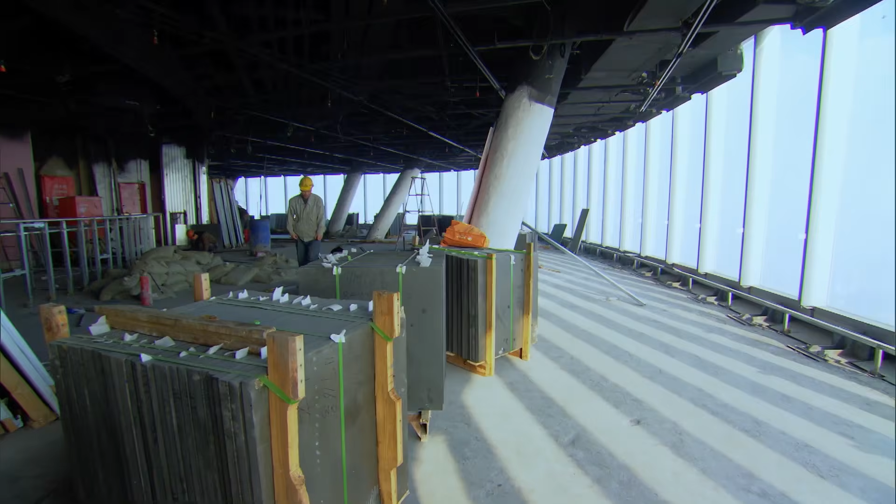At an astounding 632 meters, the Shanghai Tower will be the second tallest building on Earth, the tallest in China, and one of the tallest ever built in a seismic zone. It will be the most advanced building of its kind on the planet, with 128 floors and 9 indoor gardens, where 16,000 people will work, sleep, and shop, making it a true sky city.

And yet, this is one of the most difficult places on Earth to build a skyscraper. Building a super high-rise building in Shanghai is quite unique because you have to deal with the wind load and also the earthquake load. For Dennis Poon and his fellow engineers, it's a seemingly impossible challenge. I cannot believe that today we're designing the tallest building in China and also the second tallest building in the world.

The engineering complications begin at this mighty tower's roots. Because not only is Shanghai an active seismic and typhoon zone, but amazingly, this megacity is sinking into the soft soil below. The land under this massive metropolis is deflating like a giant air mattress, as its shallow water table collapses under the weight of its modern buildings.

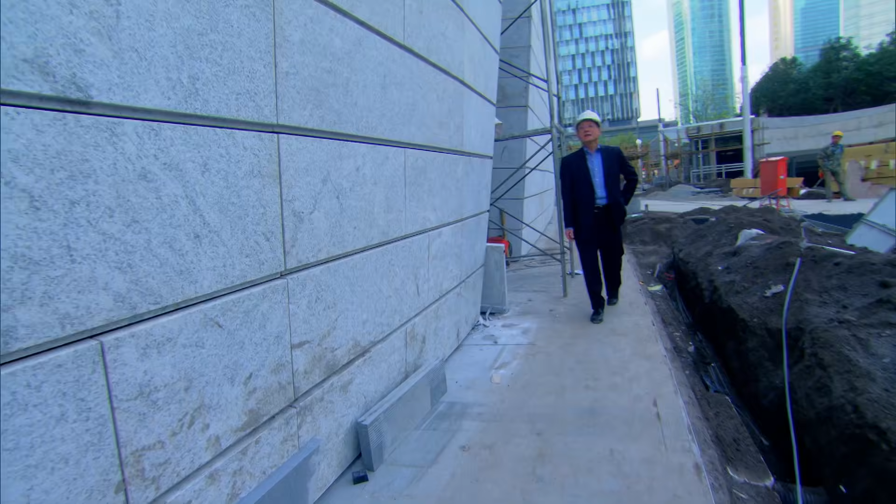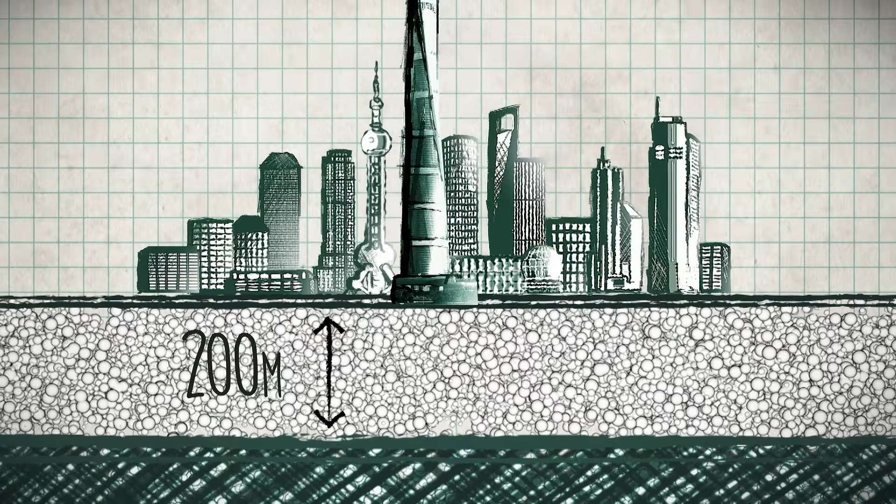For the Shanghai Tower, one of the biggest challenges is the foundation to support this super tall building. With its weight of 850,000 tons, how do you support it in the soft soil condition locally in Shanghai? The solid bedrock is 200 meters down, with Shanghai itself wallowing on a soft layer of sand, clay, and soil. A geotechnical nightmare ready to swallow an 850,000-ton building like the Shanghai Tower.

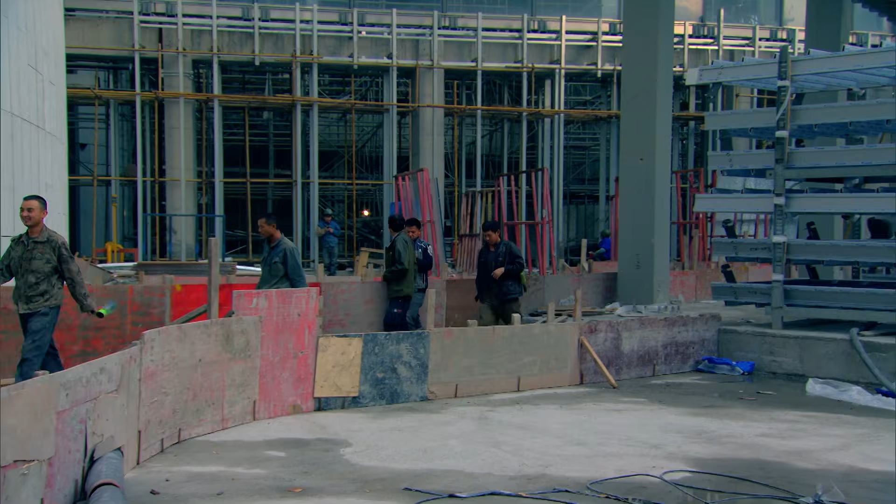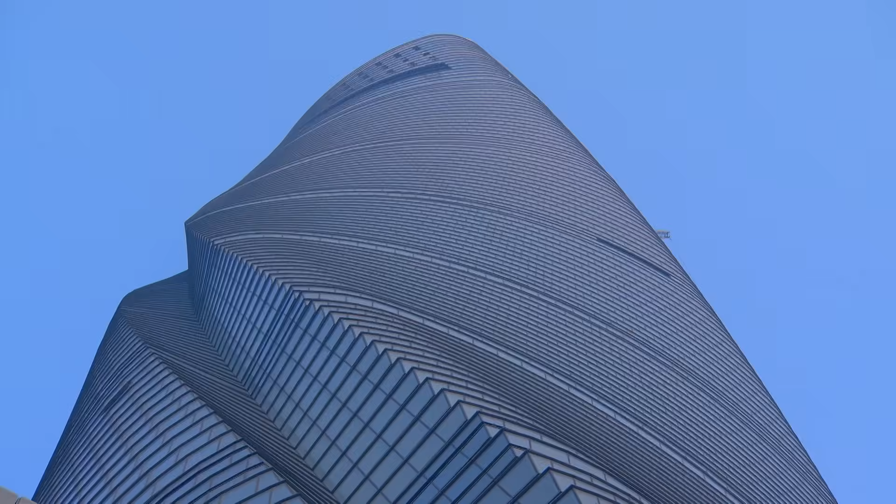So we have to design and build this foundation for the tower to deal with these challenges. And the engineers only have one shot, as constructing a tower this tall leaves no room for error. For a super tower, of course, the whole design challenge is to do the foundation right, so you don't have future problems, because you can't fix it later. The engineers will have to look to the great innovators of the past to defy this seemingly impossible challenge.

Once upon a time, the modern world of skyscrapers was inconceivable. Early man was limited by what nature would provide. And for the ancient Egyptians, taller had to mean wider, and an awful lot of manpower. Unless you believe in some of the more otherworldly theories. And when it's come to building towers, the ground below has frequently thrown a spanner in the works. Mamma mia! In order to create a skyscraper 11 times taller than Pisa's famous Leaning Tower, the designers of the Shanghai Tower will need to draw on the inspiration of 19th century engineering pioneers.

The US city of Chicago is home to one of the world's most iconic skylines. But just over a century ago, engineers were faced with a challenge that meant building any higher than just a few stories above street level was a near impossible dream. You wouldn't know to look at it, but Chicago is actually one of the least logical places that you could ever attempt to build a skyscraper.

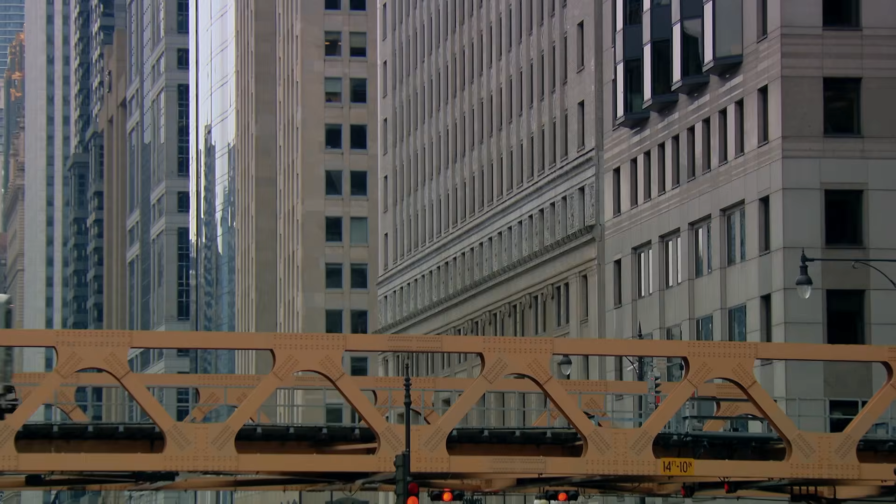We've got soil here that is incredibly squishy. Underneath this shorter, smaller layer of earth, we've got a very, very deep layer of soft, squishy clay. This is a really difficult thing to build a skyscraper on, of course, because when you load it, the building's going to sink. As property in downtown Chicago grew ever more valuable and the city began to boom, the need to grow higher and maximize space posed engineers a problem. Taller buildings would mean heavier buildings, and as they had discovered, there was a limit to the weight that the local soil could take.

This is the Auditorium Building of Roosevelt University, designed by Adler and Sullivan in 1889. It's a national landmark and so important to Chicago as well.

The building is 72 meters high. When it was completed in 1889, it was the tallest building in the city, one that would have been unthinkable just a few years earlier. And the radical innovation that made it possible came from engineer Dankmar Adler.

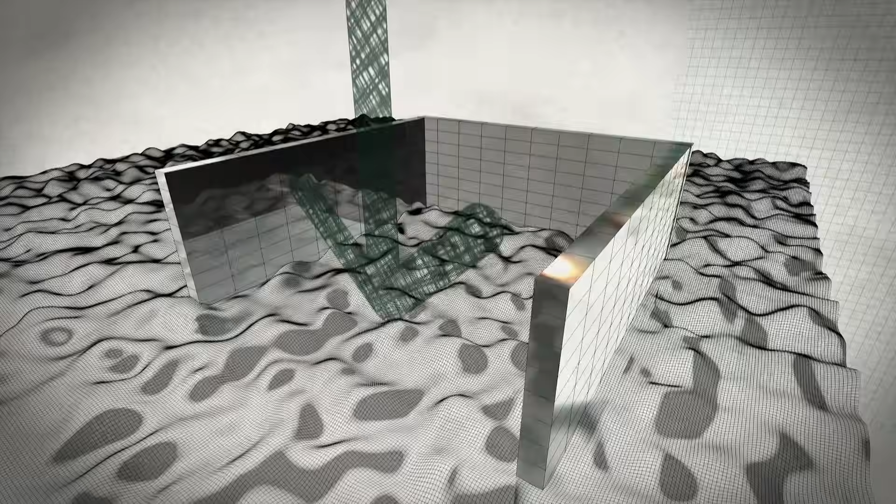We're headed down to see Adler's specially designed foundations to deal with the soil here in Chicago. Previously, the whole weight of a building would bear down on its walls, which would sink into the clay like a cookie cutter. Adler's innovation was to use wood and steel crossbeams encased in concrete to create a reinforced concrete raft that the 110,000-ton building sits on.

I'm going to illustrate what's happening here with this piece of modeling clay used to represent the clay that's under our feet here in Chicago, this sort of peanut butter jelly-like substance. The clay is really quite deep, and the bedrock doesn't start in Chicago until 75 to 100 feet below the surface. So I've got my chopstick here to sort of illustrate, and I take my structure and I go through the hard pan, and they just didn't have the technology in the 1880s and the 1890s to excavate that far down to bedrock. So instead, architects, engineers here in Chicago are coming up with new ways to solve this problem.

The method that we're standing on here is sort of the equivalent of this kind of penny that I'm going to illustrate. So this pad or this raft is put down, and then the building, the column on top of that is put on top of that. And you can see that I can push it down a little bit into the clay, but not really that far. This is distributing the load.

Adler's revolutionary engineering solution made building on substandard ground possible. And today, the city's tallest building, the Willis Tower, rises 442 meters, more than 6 times the height of Adler's auditorium. But despite its influence, the auditorium's design wasn't 100% perfect.

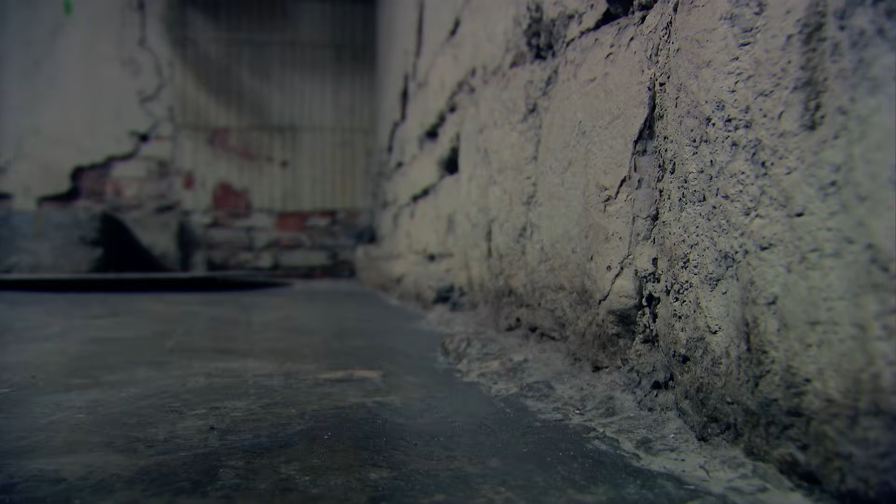So on the north edge of the building, we've got these large, heavy exterior walls that are much heavier than what's happening on the interior of the building. And we can see the challenge with that, the fact that this is much heavier and this is much lighter in the building with this long crack here in the floor. And we can also illustrate that pretty well with these marbles.

Although the Shanghai Tower would be impossible without the innovation of reinforced concrete raft foundations, its engineers cannot afford for it to subside like the 19th century Chicago auditorium. If the building does not settle uniformly, it will tilt. This is something we cannot afford and we don't want to see. Because the building is so tall, a slight tilting will cause a big deflection on the top. To overcome this potentially catastrophic risk, the engineers will have to take Adler's ideas and supersize them.

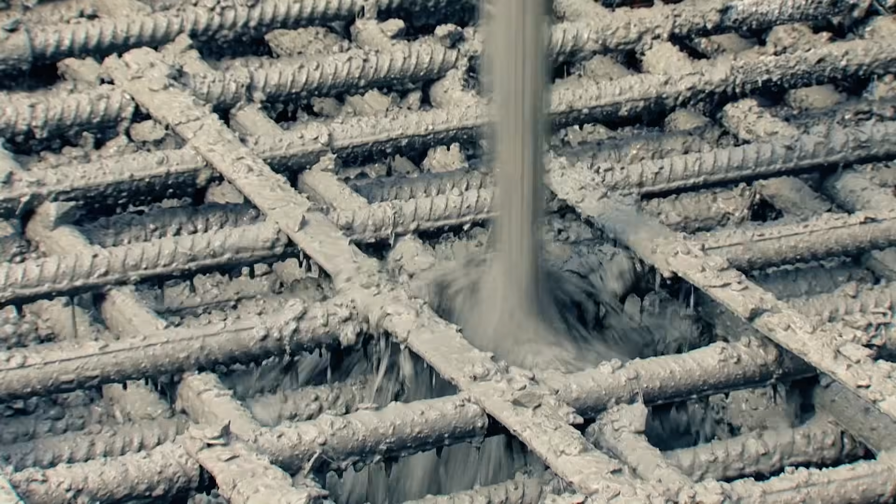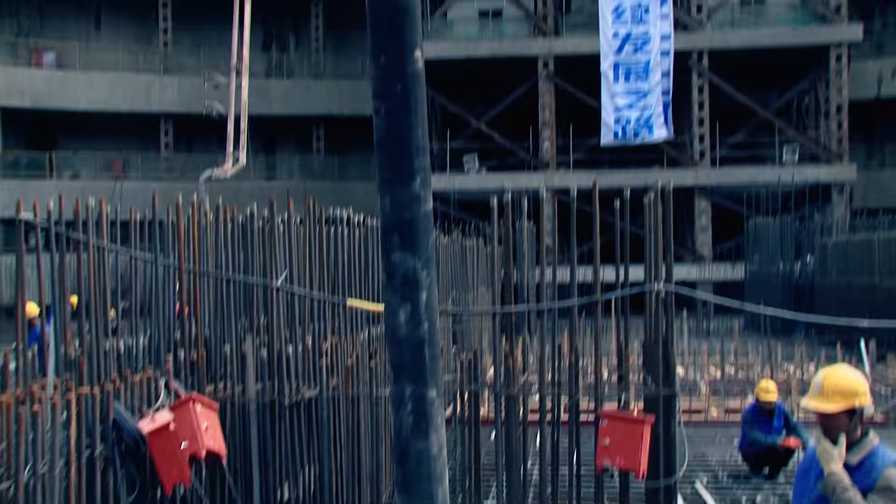In 2008, a 2-year operation to build the foundations begins. First, they sink hundreds of deep supporting piles into the soil, then begin pouring the raft or mat foundation. Construction of the mat foundation so deep below grade is a big challenge. It takes a world record 60 hours of continuous pouring to create the mat, a process involving 2,000 workers and 450 concrete trucks. We basically use almost all the concrete trucks in Shanghai, and finally we overcome this challenge.

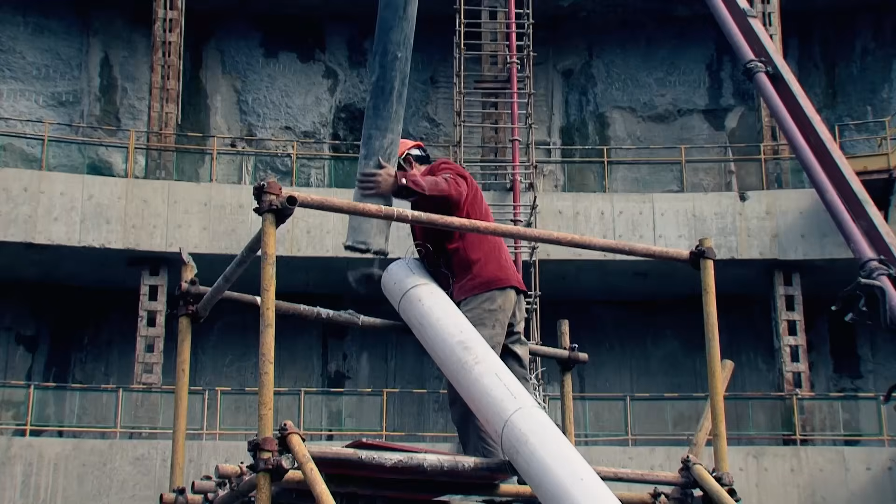All in all, the mat soaks up 61,000 cubic meters of concrete. Another world record. 61,000 cubic meters is a lot of concrete, and comparable to the Hoover Dam many years ago in the States. Without the pioneering work of engineers like Dankmar Adler, building a tower this high in Shanghai would have been an impossible dream.

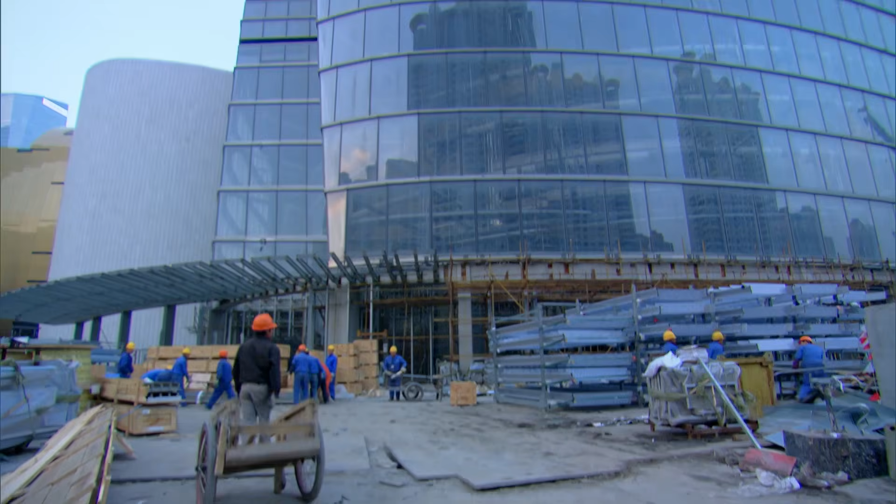You can see the sheer scale of this tower, and you can imagine how big the foundation we need to support this tower in a soft soil condition. And we get it done right, look. I even cannot believe it.

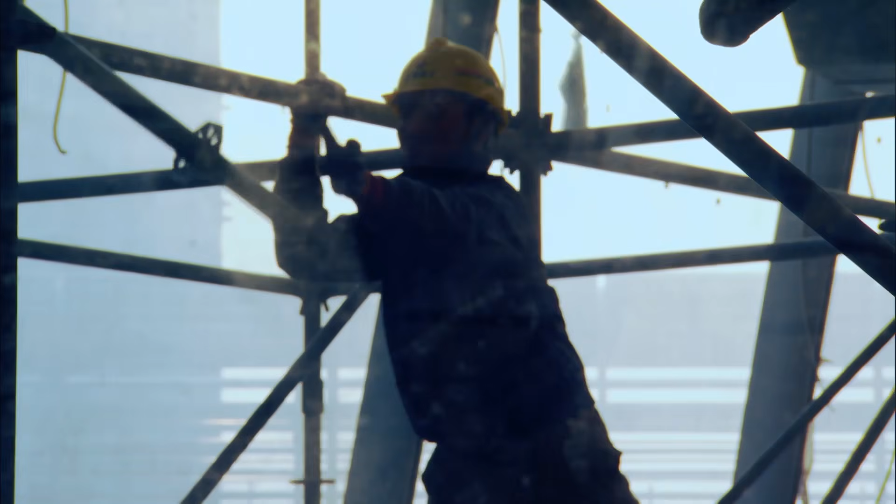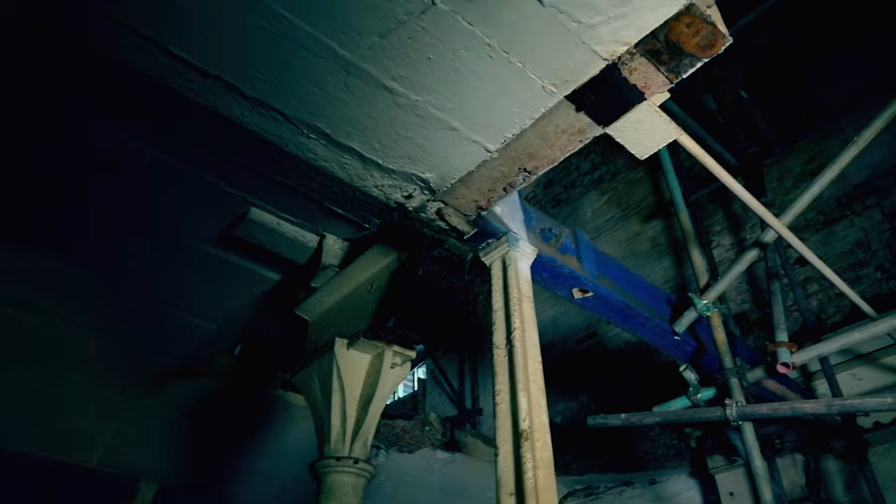Begun in 2008, the Shanghai Tower will be the most advanced skyscraper in the world. The tallest building in China and the tallest ever built in a seismic zone. It is a fantastic piece of engineering. We are all grateful that we have the opportunity to work on this iconic project.

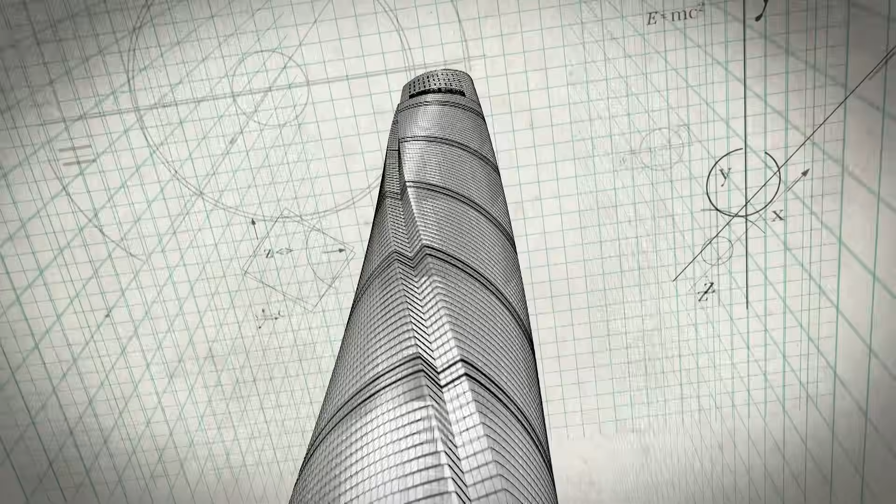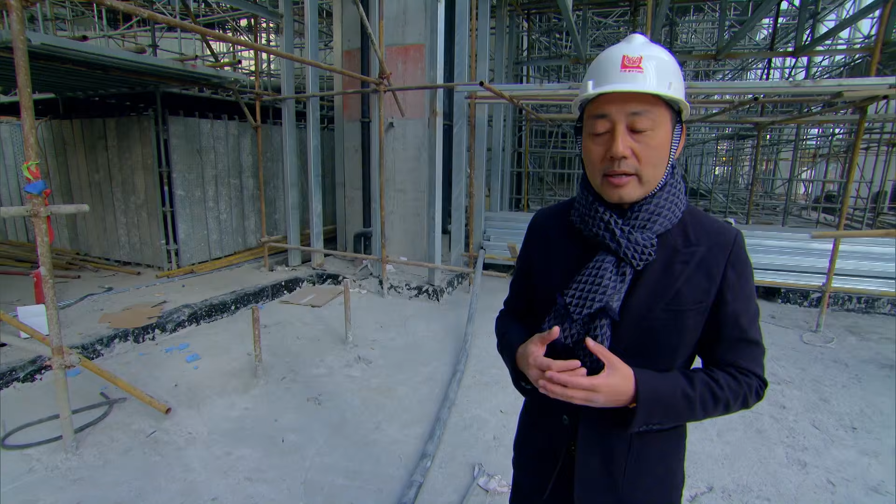The tower is a massive 632 meters tall and will consist of 128 stories of cutting-edge engineering and contain gardens, shops, hotel, office space and residential accommodation. Actually to build it and also overcome many engineering challenges, it's still, to me, quite incredible and unbelievable.

But in creating a building this immense, the architects and engineers have set themselves a seemingly impossible challenge. Each floor weighs an average of 6,500 tons, making the building enormously heavy. The structure itself has to support a total of 850,000 tons.

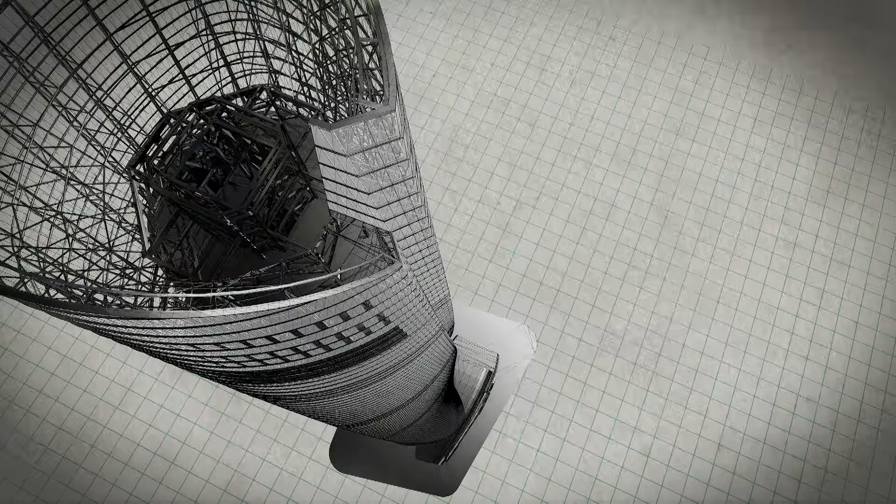For a super tall building, you have enormous forces to support. We're not building a house, we're building a 128-story building, the second tallest building in the world. It's a challenge that would have been impossible if today's engineers weren't able to draw on the great innovators from history.

Once upon a time, the maximum height of a building was determined by the thickness of its walls, because the weight of each story had to be supported by the floors below. It meant tall buildings remained the realm of the rich and powerful.

Medieval religious architects enabled thinner walls and large stained glass windows by using external supports called flying buttresses. But these also made buildings grow sideways and were still the preserve of the wealthy church. Bless you, my child. But there was a revolution on the horizon.

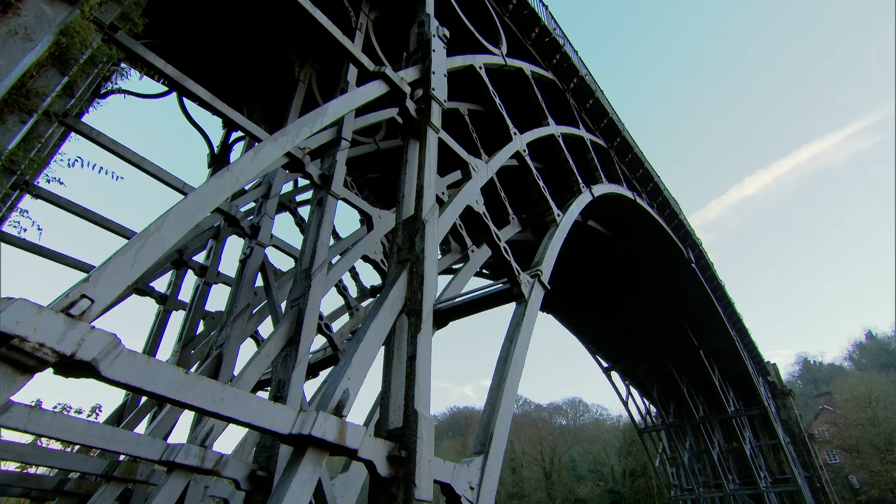And this seemingly innocuous and picturesque region surrounding the River Severn in England was the crucible of it all. Shropshire was at the heart of the Industrial Revolution, the Silicon Valley of the 18th and 19th century. Its engineers were at the very cutting edge of technology because they had mastered the production of iron.

This area gave birth to some of the greatest engineering pioneers of our time and enabled the construction of iconic structures like this Iron Bridge, the first cast iron bridge of its kind in the world. But just a few miles upriver is a somewhat less iconic, but arguably much more significant building.

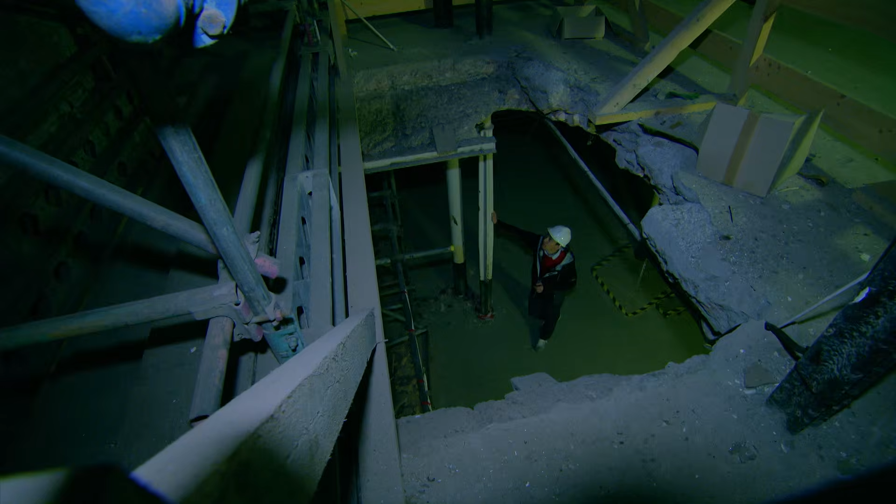It wasn't until about 20 years ago that the historical importance of this building was properly understood, which is why it's fallen into disrepair. This crumbling red-bricked mill is one of the most important buildings in the world. This incredible but rather sad and dilapidated building in Shrewsbury is arguably the world's first skyscraper.

It's the first time that iron was used in a multi-story frame construction, and it really paved the way for tower blocks and skyscrapers that we know today. Built in 1796, Ditherington Flax Mill was the brainchild of engineer Charles Bage. And he drew on the region's groundbreaking use of iron to build the first metal-framed building on the planet.

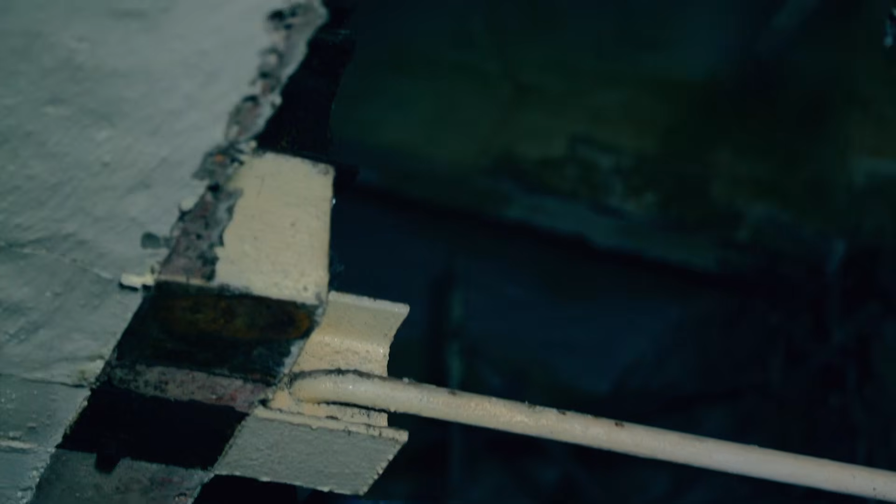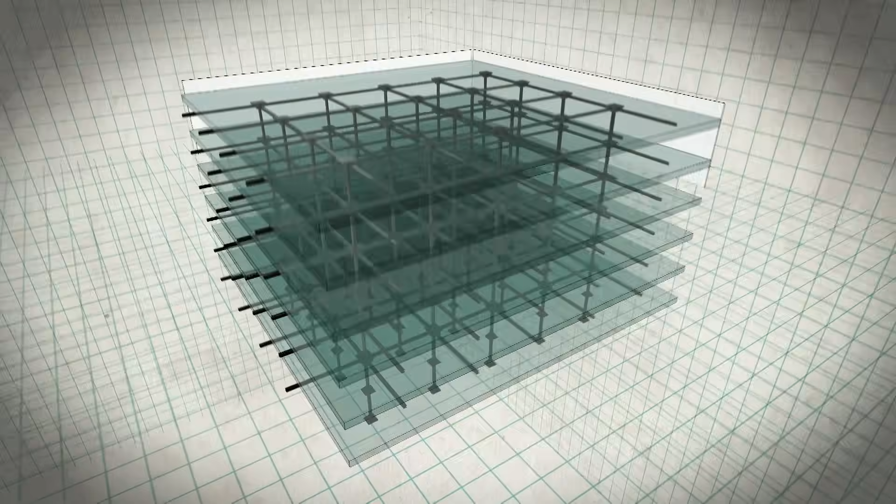Previous to the iron frame, the taller the building, the thicker the walls had to be to support them. But with Bage's design, the walls could be thinner, which meant that the rooms could be much larger. It also meant that you could design buildings much taller. In Bage's design, all the weight of the building was borne on its iron frame. So none of the walls were load-bearing, making the sky the limit for the first time.

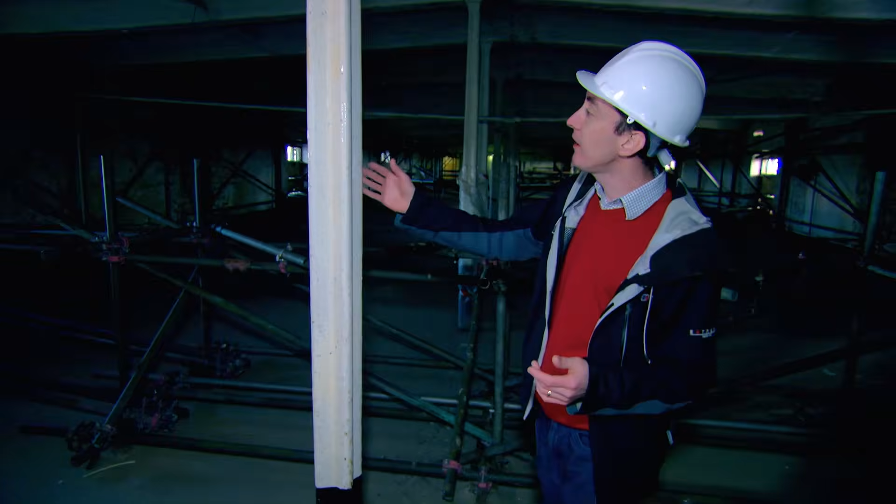This main building had 5 floors, including this attic, which was previously unheard of. It had a working area of over 2,800 square meters, or 31,000 square feet. And these narrow, relatively lightweight metal beams would be able to support much more weight than the solid brick walls of previous buildings.

This simple but brilliant engineering solution meant that Bage's flax mill was the forerunner of almost every large-scale building in the modern world. What Bage achieved in this building was truly remarkable.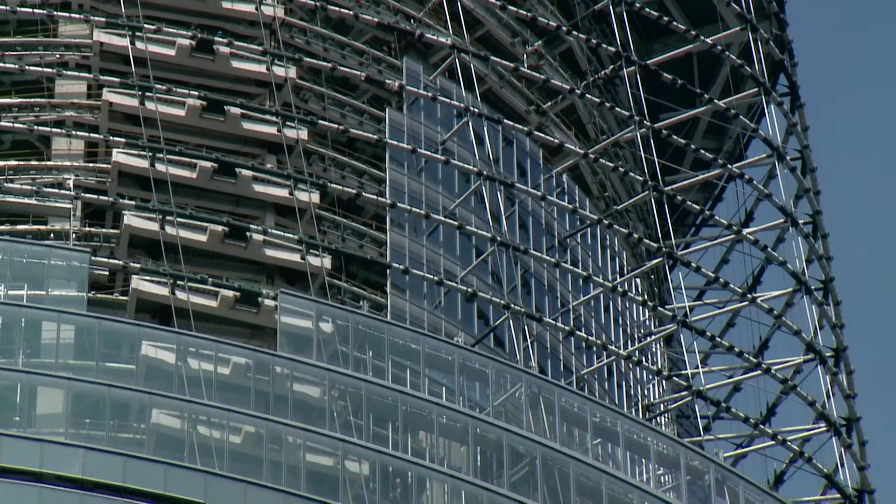Because the steel bears the weight of the structure, the external walls no longer need to be load-bearing. They don't even need to be flat or straight. They can be made from a variety of lightweight materials, such as glass. And architects can mold them into any shape they want to express their vision.

Jun Xia was one of the lead designers on the project. When you're in the city looking at this building, from every different view you look at, the building looks a different shape. The movement looks different. You feel like it's alive, something alive, an organism, you know, because it doesn't feel like it's a dead, just a cold object.

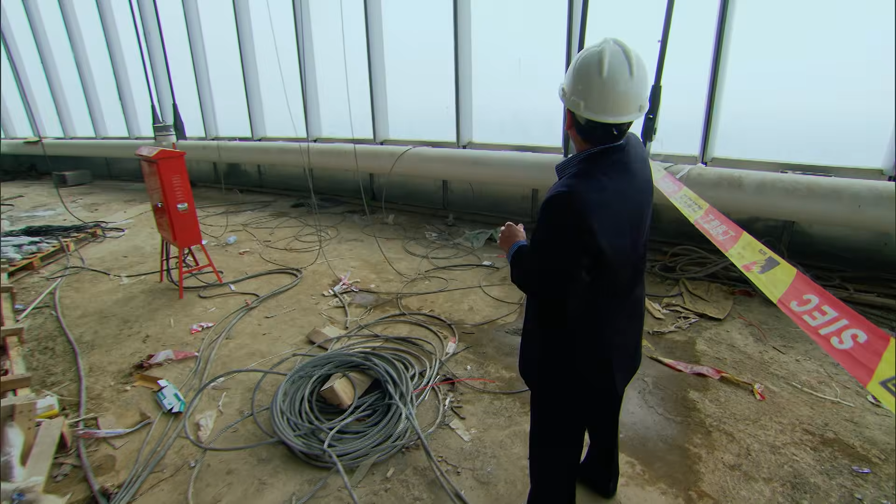The whole building is clad in a series of glass walls, each of which can be suspended over many floors like a giant curtain, thanks to the strength of the steel rods that hold them in place. We're at the top of the 101st floor of the building, and you can see the curtain wall is being hung 14 floors above us.

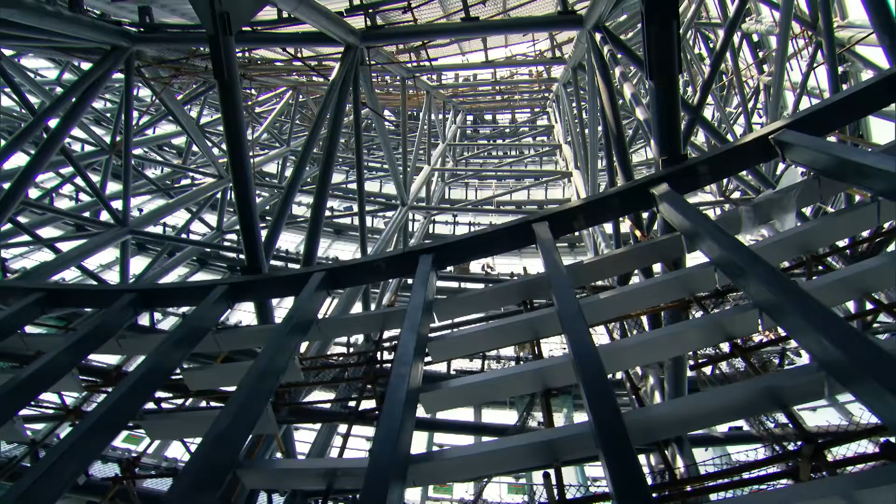Between the curtain wall and the inner core, which houses offices and hotel rooms, the designers have allowed the building to breathe, creating a massive open atrium, only possible because of the building's lattice-like steel frame. Here we are standing on the 8th floor of the building. You don't want to block too much sunlight to a massive structure. It opens up the airy feeling. Yet despite the use of super lightweight materials, the Shanghai Tower weighs in at a staggering 850,000 tons.

With 24 million inhabitants, Shanghai is one of the most densely populated cities on Earth. And the only way of expanding its globally important financial center is to reach for the skies. 632 meters tall, the Shanghai Tower is being built as a living city in the clouds. It will house offices, shops and hotel rooms, as well as conference and concert halls. If we turn this building down, it's going to be 600 meters long, about 6 urban blocks. So in a way, we think each of these zones is a community.

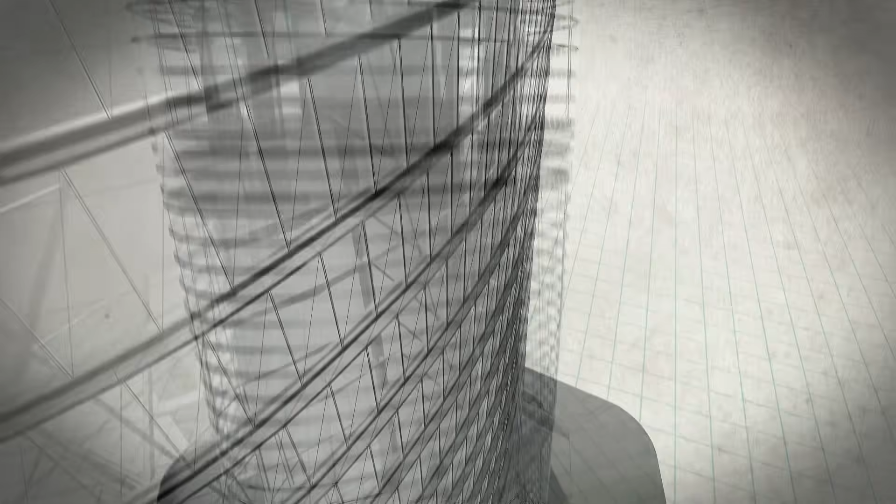But in creating a super tower in which 16,000 daily users will work, rest and play, its designers have set themselves a lofty challenge: how to transport its population around this massive structure. Who wants to come up to a 100-story building and work up there? I can see many office buildings with a huge crowd in the lobby. It's an engineering feat that would be impossible without one of history's great innovators.

By the mid-19th century, the world's skylines were still relatively skyscraper-free. For one reason, no one wanted to take the stairs. Unlike the penthouses of today, the higher you lived, the poorer you were. Mustn't grumble. Steam-powered and hydraulic lifts were being used in mines and factories for freight, but they were too dangerous for people. The ropes on the pulley system were inclined to break.

But city skylines were about to change. Thanks to a man named Elisha Otis, in 1852, he came up with an idea that revolutionized the world of construction, pioneering a simple mechanism that changed the way we use tall buildings forever.

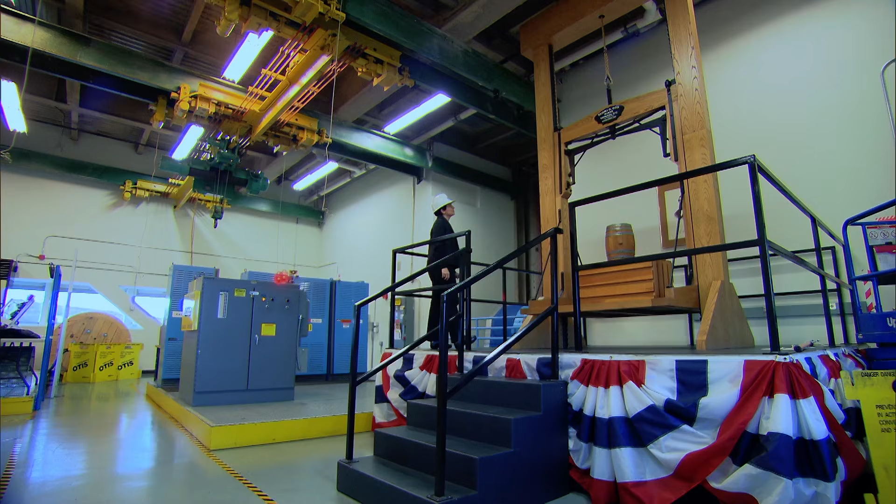So we're here in Bristol, Connecticut at the Otis Elevator Company test facility. This is where they test the newest elevators that they're going to install in buildings across the world. But they also have this replica of a device that Elisha Otis first constructed for the Crystal Palace exhibition, the World's Fair that ran from 1853 to 1854.

The World's Fair was the perfect shop window for Otis, who was a showman as well as an inventor. He knew that the eyes of the world would be upon him if he could prove that his idea for protecting passengers was safe as well as practical. So I think it's important to remember that Otis didn't invent the elevator. Certainly there had been ways of moving goods and people up and down from floor to floor using hoists and pulleys for centuries. But what Otis did do was to recognize that people were afraid of going into an elevator. So at the 1853-1854 World's Fair, he builds this device to provide a brake, a safety, in case the rope broke.

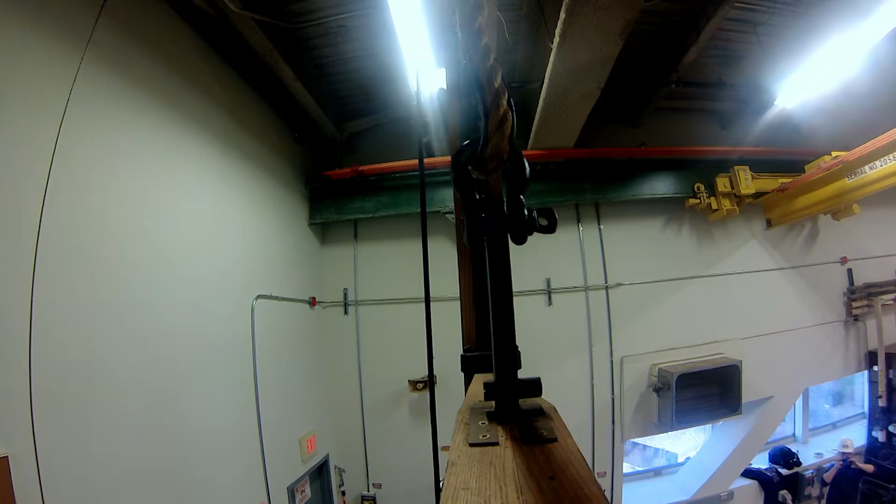With his showman's hat on, Otis decided the best way to prove his idea was to put it to the test, using himself as a guinea pig. In front of an expectant audience, he stepped onto the platform, rose above the crowd, and gave the signal for the rope to be cut, a potentially fatal step. So let's see if Mr. Otis's invention still works. Ready whenever you are, Rich.

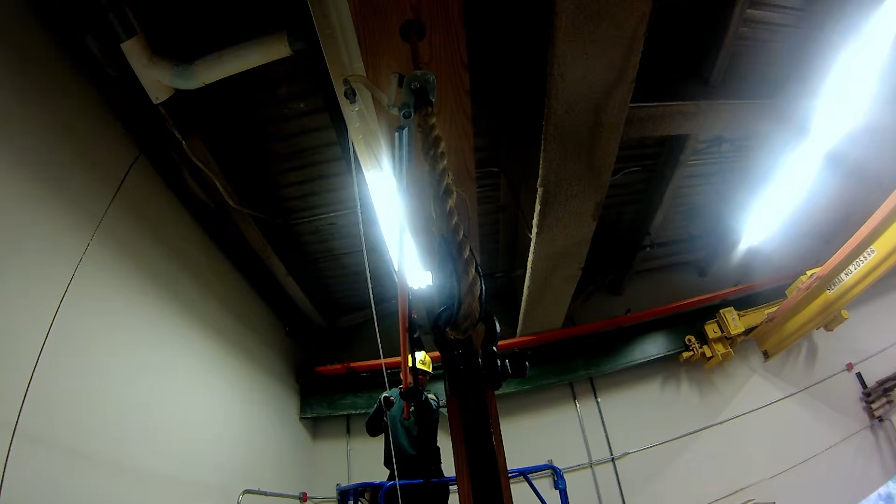The system features a wagon spring, which is held up by a rope which keeps it in a state of constant tension. When the rope is cut, the tension in the spring is released, which causes pins fixed to the side of the spring to lock into a ratchet located in the wooden frame. This brings the elevator to a complete stop, preventing it from falling and injuring any passengers.

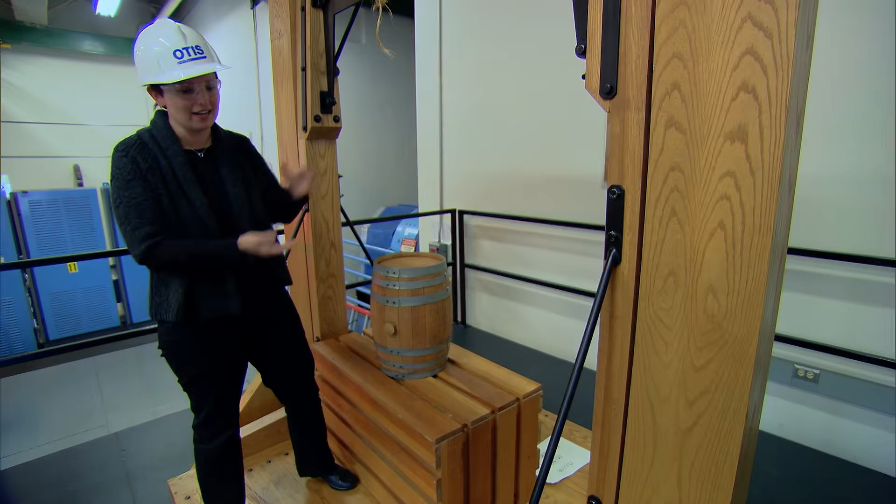And all these years later, every single elevator today around the world has a similar safety device that is allowing passengers to feel safe in tall buildings. And I didn't plunge to my death. Otis's invention transformed the world's skylines, and cities like New York that couldn't expand sideways could now reach for the skies.

Fittingly, in 1913, it was the Otis Company that were commissioned to provide the lifts for one of New York's most iconic skyscrapers, the Woolworth Building. By 1916, more than 100,000 people had paid their 50 cents to ride the elevator to the observation deck at the top. And now, 100 years later, those original Otis elevators are still being used to carry office workers up and down.

Otis's invention meant that instead of the poor being consigned to the building's upper levels, the value of floor space now increased as you went higher. Penthouse living was what everyone dreamed of. As we drive through New York, it's easy to forget, I think, that within just a short span of time, just about 160 years, all of these skyscrapers have been constructed. And so the rise of the elevator and the rise of the skyscraper are so closely linked.

Otis's first passenger elevator travelled at 0.2 meters per second. At that speed, it would have taken nearly an hour to reach the top of the Shanghai Tower. Look outside. We are more than 100 stories above ground. You can see the magnificent view. For this tower, we are using the world's fastest elevator traveling at 18 meters per second, which is faster than the speed of a car traveling at normal cruising speed.

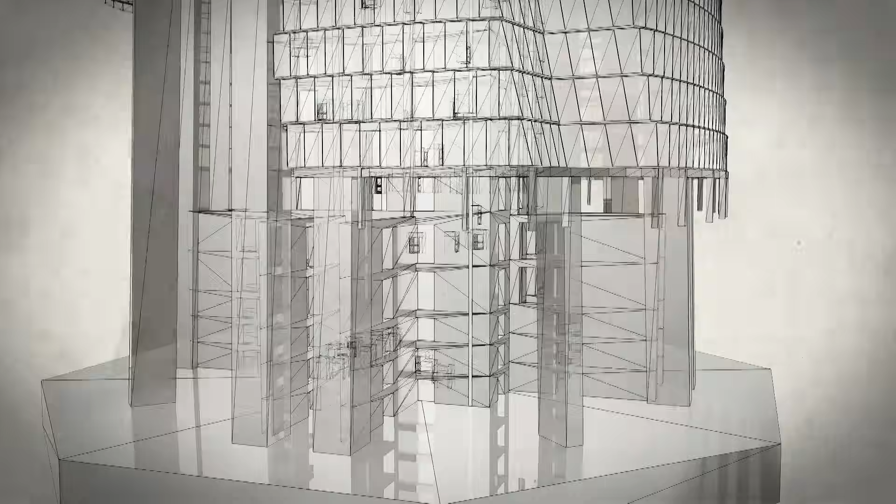In all, the tower has 106 elevators, single and double deckers, including the world's furthest travelling single elevator at 578.5 meters. And along with the residents, shoppers and office workers, they will transport thousands of tourists to its top floor observation deck.

We are on the street level right now. You see this 128-story building. The view at the top of the Shanghai Tower will be unique. And when it's all done with the elevators, you can get up from the ground floor to the top up there in 35 seconds. Marvelous.

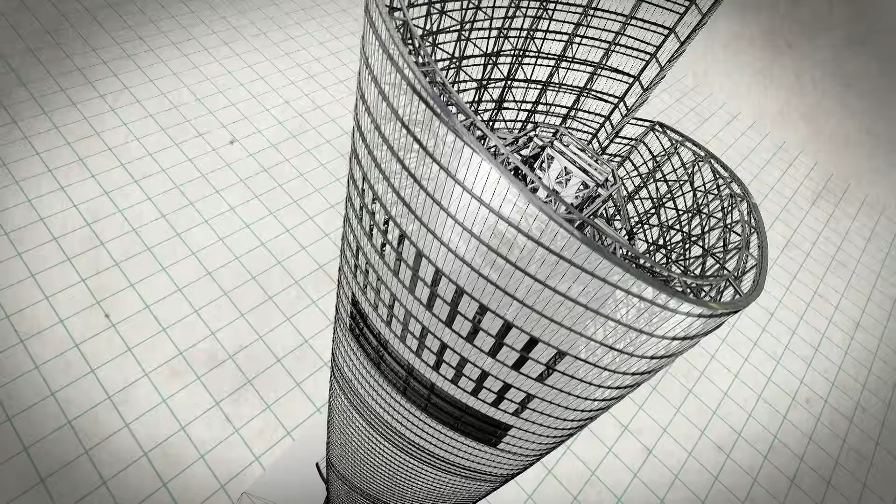The Shanghai Tower's 632-meter elevation won't only provide stunning views of the metropolis below, it will also present a massive obstacle to the wind. Shanghai is in a typhoon zone, and defending the tallest building in China from the immensely powerful and potentially devastating winds that sweep through the city is a major challenge to the engineers.

The first wind tunnel was constructed in 1871, a full 30 years before the Wright brothers' inaugural powered flight. But they had always been very much geared to aeronautical engineering. That was until brilliant engineer Jack E. Cermak evolved the technology to enable the world's skylines to grow ever higher. In the late 1950s, Cermak and his contemporaries pioneered the use of new wind tunnels.

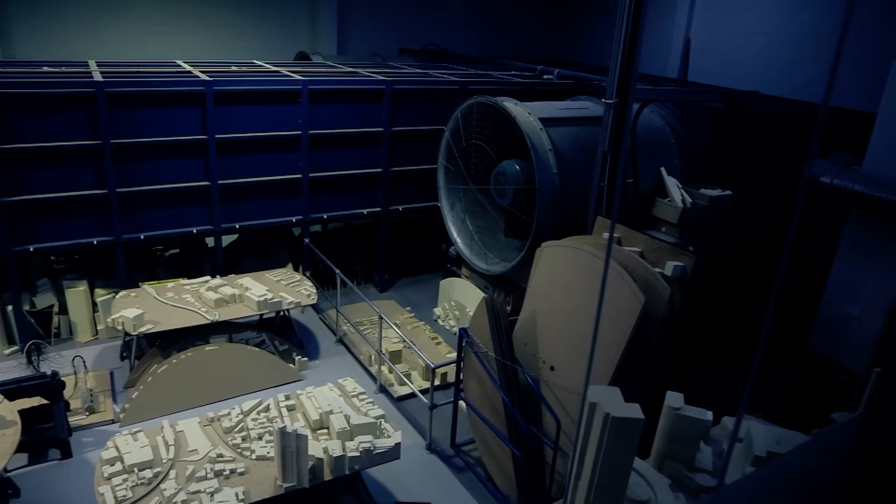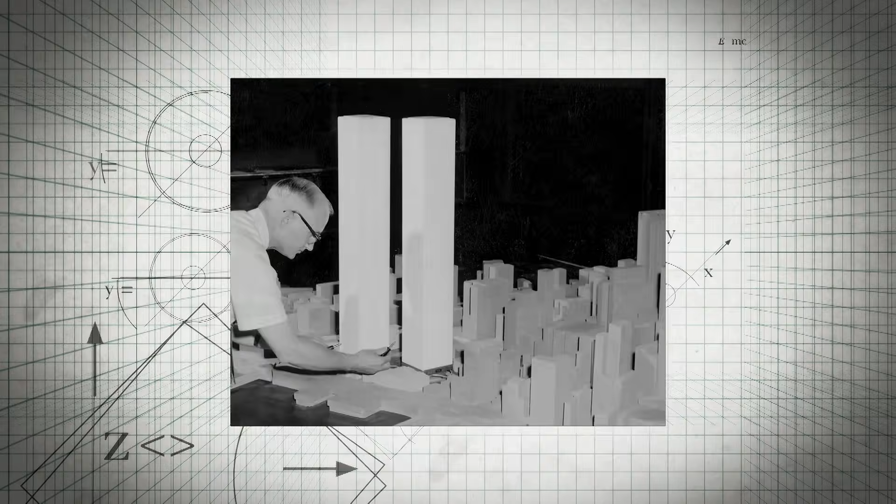Professor Rhys Morgan is visiting wind engineering firm RWDI, who have drawn on Jack Cermak's innovations, which included much bigger tunnels than for aeronautics and used irregular shapes to mimic the unpredictable winds that can hit cityscapes. Blocks like these on the floor create the kind of turbulent atmosphere, the turbulent winds that you see in cities and urban environments. So they're perfect for testing structures that we want to build in cities.

One of the early skyscrapers to be tested in Cermak's wind tunnel was New York's World Trade Center, then the world's tallest structure. The innovations that resulted feed into the design of every new skyscraper, including the Shanghai Tower. A scale model is being placed into a mock-up of the London skyline to demonstrate how wind can dangerously affect tall buildings.

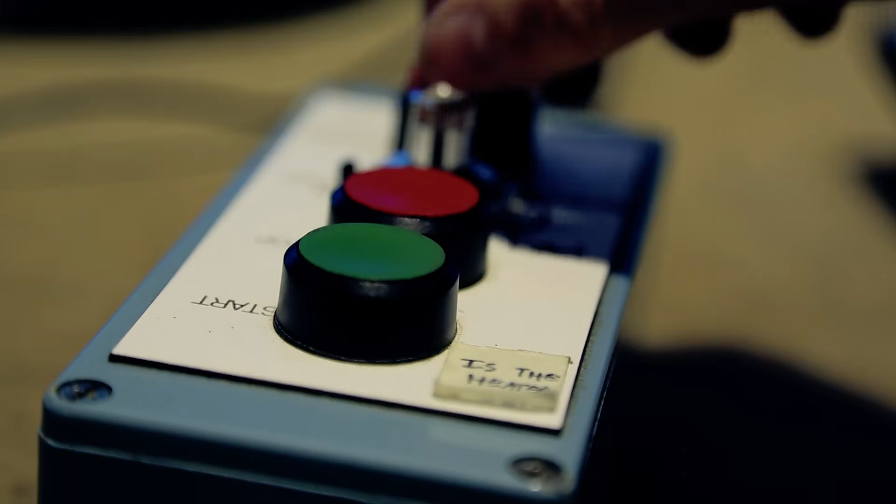Wow, it's really windy. As the wind rushes past the structure, it forms into eddies of low pressure on either side. So the wind is coming in here, it's hitting the side, and then as it comes around the corner, it produces a low pressure region here. And that causes the building to move this way.

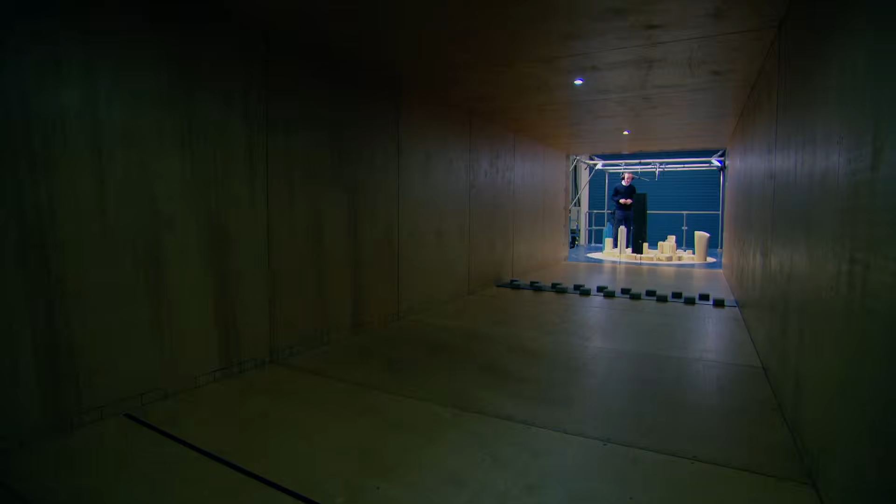But then that means that the wind coming around this end starts to cause a little bit of movement this side and low pressure. So we start to get this low pressure, low pressure, low pressure, and that causes this oscillation back and forth. This is just amazing. This is real engineering happening here. That's moving a good 5 centimeters either side. I wouldn't want to be on the top of this building if it was a real building in the city.

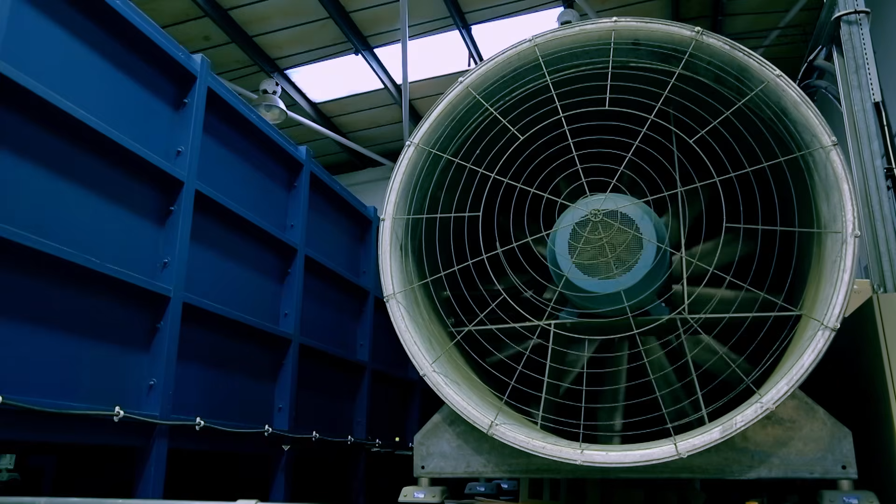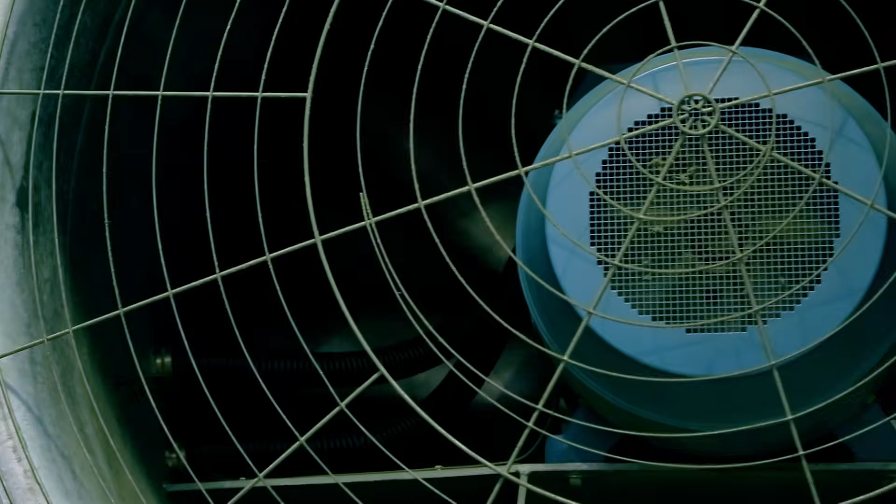For architects like those that designed the Shanghai Tower, the challenge is to come up with a shape that reduces those vortices. Okay, let's try this one. This time, the building is tapered like an elongated pyramid. And you can see there's very, very little movement. Let's turn it up a bit more. We're running at 3 times the wind speed of that very first model that we saw, and the building's just not moving anything like as violently.

Because of the tapered shape of the building, the wind creates vortices of different sizes at different heights. It's causing some oscillations down here, but they're much slower than the oscillations occurring at the top end. That means that different parts of the building are trying to shake at different rates, with the net result, in this case, that they cancel each other out. And so it prevents the building from oscillating quite so violently.

Jack Cermak's invention has allowed city skylines around the world to change radically. Today, no one would think of building a skyscraper without first testing it in a wind tunnel. The Shanghai Tower is tapered, but it also has a distinctive twist, which is directly influenced by tests like this. The design reduces wind loads on the building by 24%.

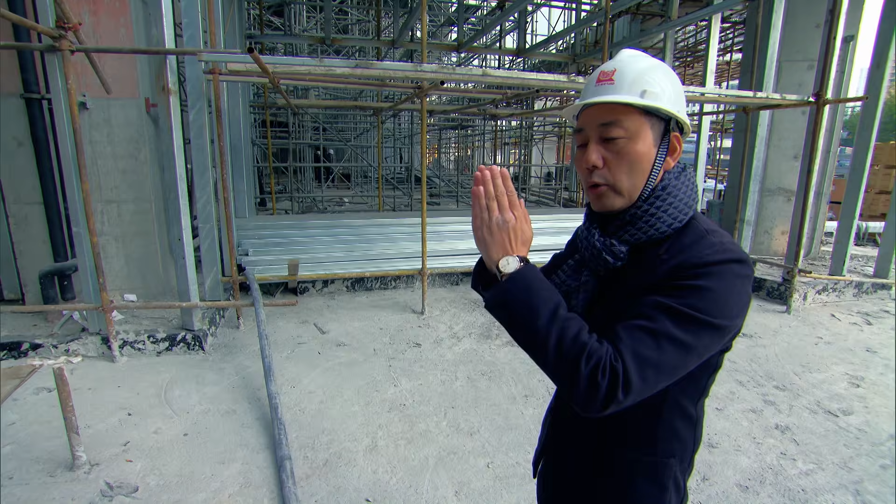The twisting of the building is a great example for engineers that can combine creative architectural design with good engineering when we work together in tandem with each other. The architects also designed a notched V running the entire length of the spiral. Number one, if the building is a continuous spiral without this V, you don't understand the spiral as much. Once you have this break of the V, you can actually read the building's movement, the spiral shape, much better, clearly. Number two, we actually make this an entry to the office zone.

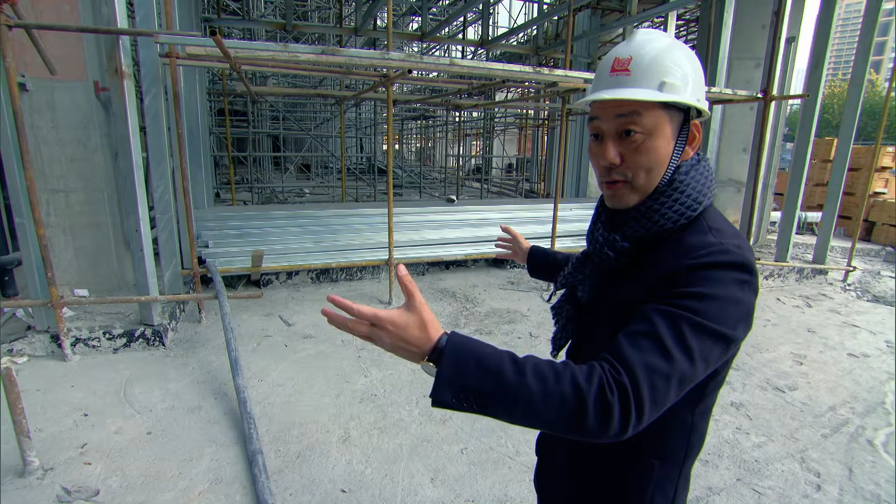So it's very visible, very easy to remember, right? People don't get lost. Then number three, eventually, we make this all LED graphic. So it's like a river runs through it. It's very, very cool. The notched V-shape started out as an architectural flourish. But when they tested it in the wind tunnel, the designers of the Shanghai Tower made a discovery as welcome

as it was unexpected. This notch also helps to cut down the turbulence effect or the vortex shedding of the building. So the tapering shape of the building helps the aerodynamics, the twisting helps, and the notch helps. And at the same time, the tapering also lowers the center of gravity of the building. That gives us more stability. The lower the center of gravity, the more stable the building is.

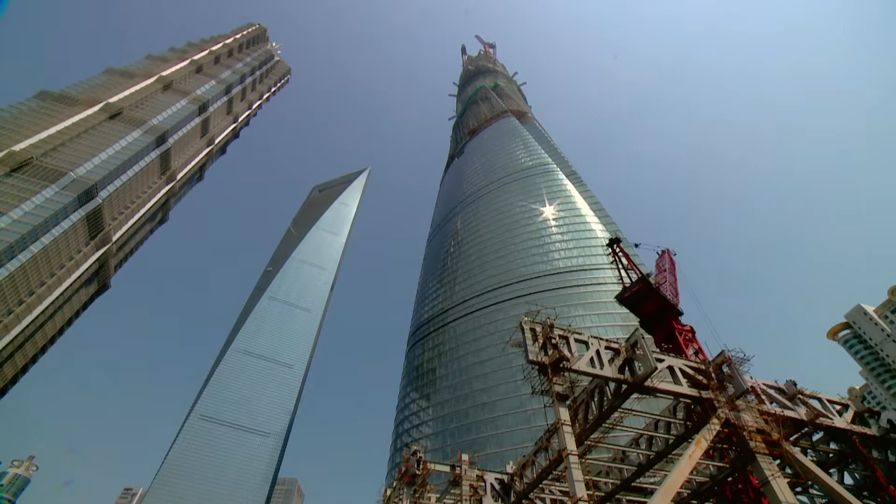Started in 2008, the Shanghai Tower will be the most advanced skyscraper in the world, and the tallest building in China. And in creating this record-breaking super tower, its engineers are having to overcome seemingly impossible challenges. But the Shanghai Tower faces another potentially devastating natural phenomenon. Shanghai is in a level 7 seismic zone.

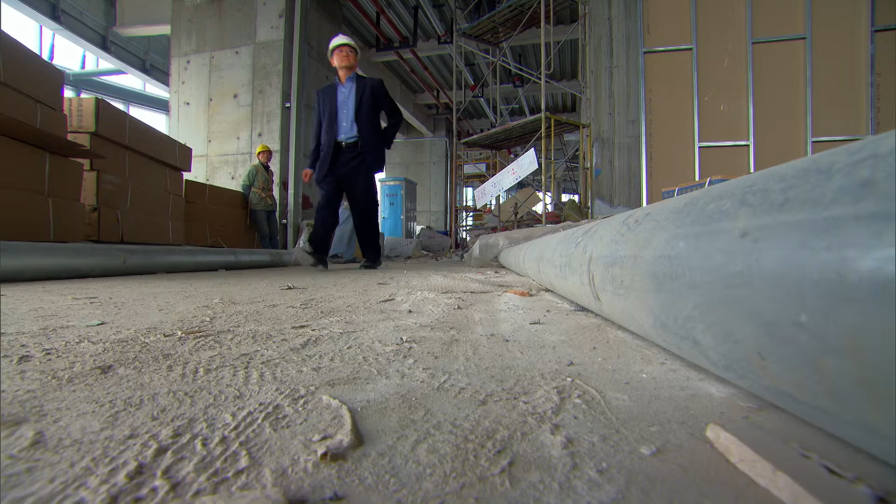Shanghai Tower is the second tallest building in the world. Of course, we're not only designing this building for typhoon wind load up to 120 miles per hour, we also have to design it for significant and severe earthquake. To overcome the challenge, its engineers will have to look to history's great innovators.

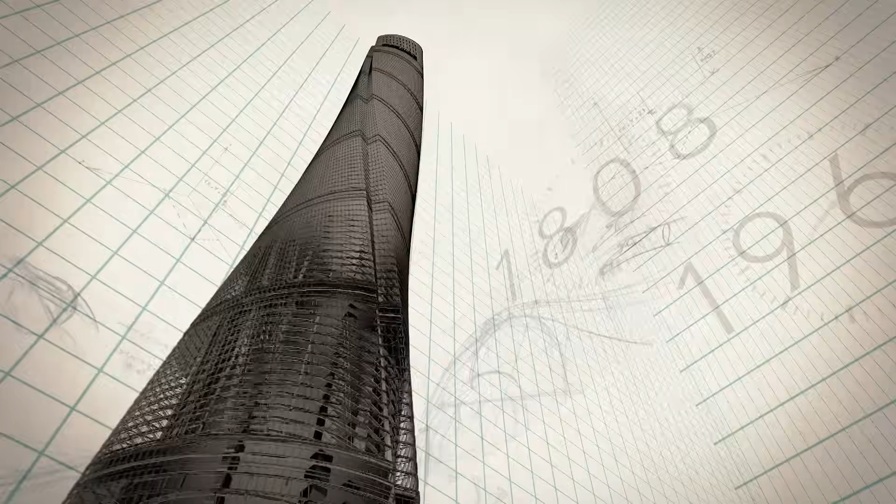Earthquakes are among the most powerful of all natural disasters, leveling buildings and triggering tsunamis. Neighboring Japan is the most seismically active country on Earth. For years, no one could understand why regular buildings would collapse in earthquakes, while traditional pagodas stayed standing.

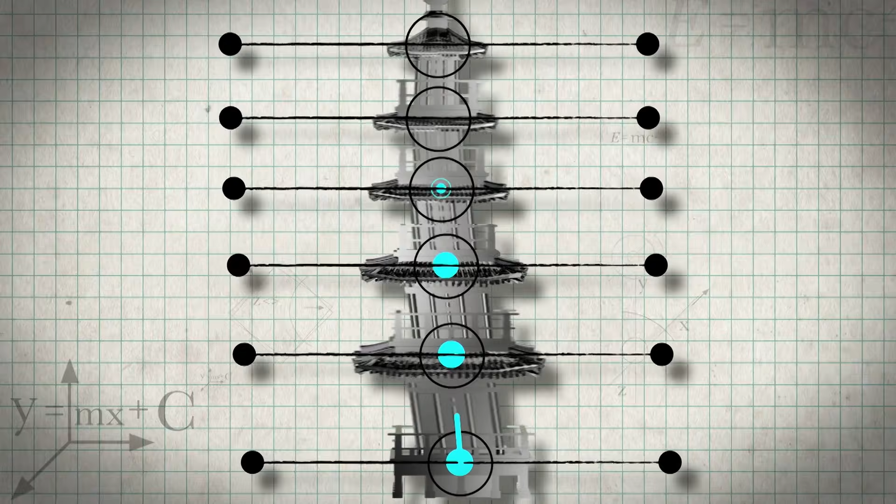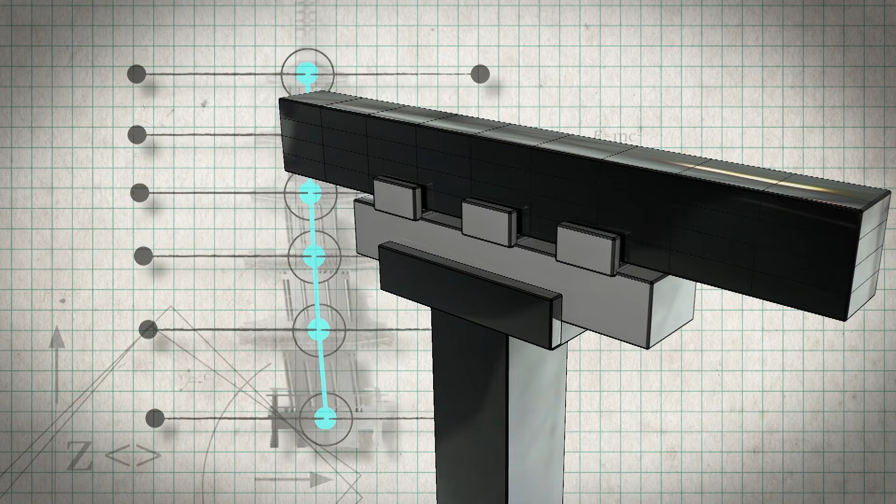Pagodas are typically 5 floors high, but each floor is capable of moving independently, so when a quake strikes, its snake-like pattern keeps the center of gravity more upright than a rigid building would. The wooden joints that support each floor consist of several separate components, so each part can slide and move, and the friction they create acts like a damper to soften that movement.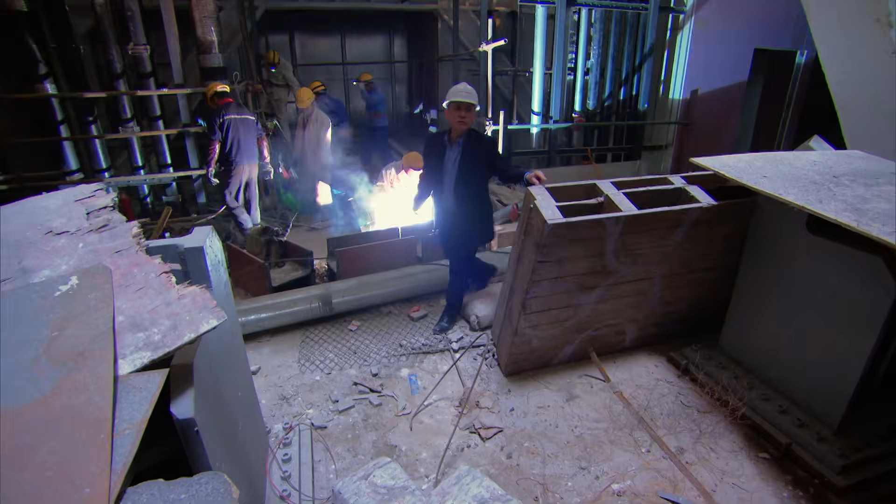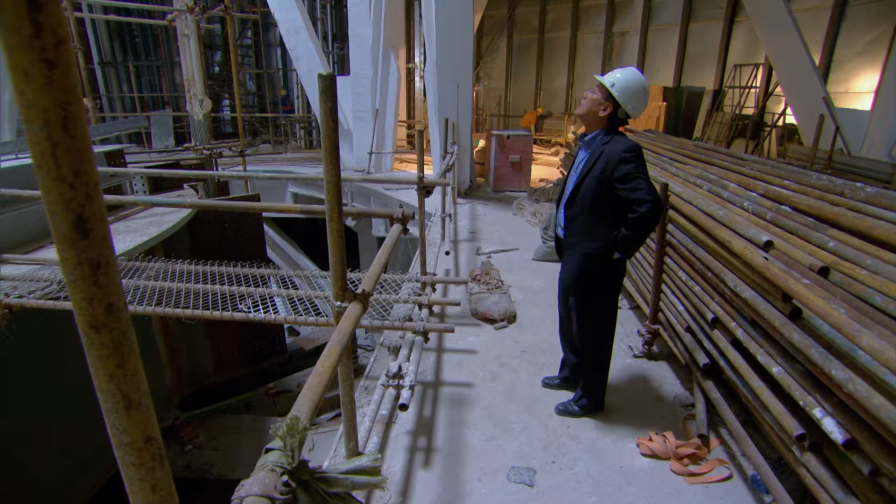Here we are, coming up to the 125th floor of the tower, which is one of the most important rooms in the building. So what is it that makes this such a key part of the structure? The answer is suspended above Dennis's head. You can see we have a 1,200 tons of steel block being hung 4 stories above us. So why would engineers take up valuable floors and sacrifice the revenue they could generate with a steel block the weight of 600 family saloon cars?

Boston's John Hancock Tower, 60 stories high, was completed in 1976. Its then futuristic glass-clad design anticipated the skyscrapers we know today. When it first opened, upper floor occupants complained of motion sickness as the building swayed in the wind. This came to the attention of an engineer, William LeMessurier, who came up with an ingenious solution.

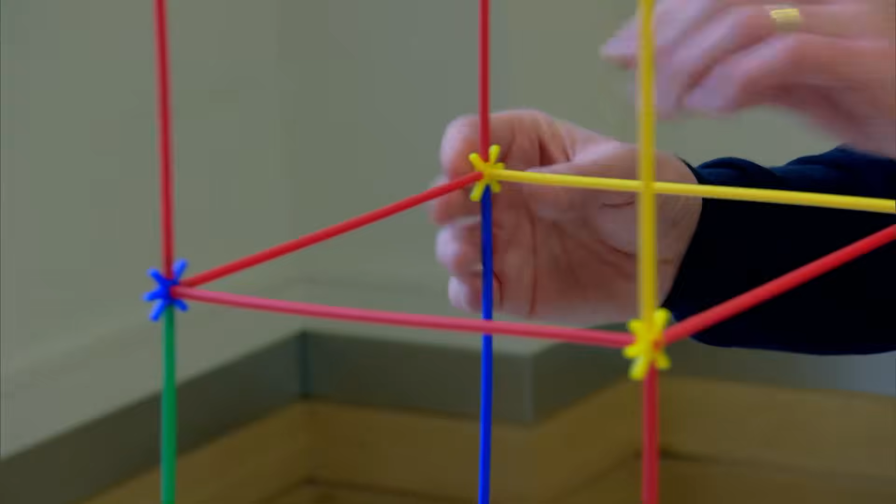What I've got here is a very simple model of a skyscraper. It's a beam structure going up several stories. Turning a handle at the base of the structure mimics an earthquake. With steel-structured buildings and glass buildings, of course, we're reducing the weight of those buildings, so you can actually build them much taller. But then you do have this problem with sway.

LeMessurier's genius was to find a way of counteracting and cancelling out the swaying of the John Hancock Tower. He took over the 58th floor and installed 2 steel boxes, each filled with several hundred tons of lead and resting on a steel plate. You have to imagine this is an 800-ton weight that I'm lifting up onto my skyscraper now, and I'm just going to tie it to the top of my structure.

The tuned mass damper, or TMD as it became known, had a dramatic effect. It's amazing. The structure is hardly moving. I mean, it's quite phenomenal. So what we're seeing here is the mass damper oscillating out of phase with the vibration of the structure. In a building like this, you wouldn't have an 800-ton ball flying around violently and smashing into the walls and things.

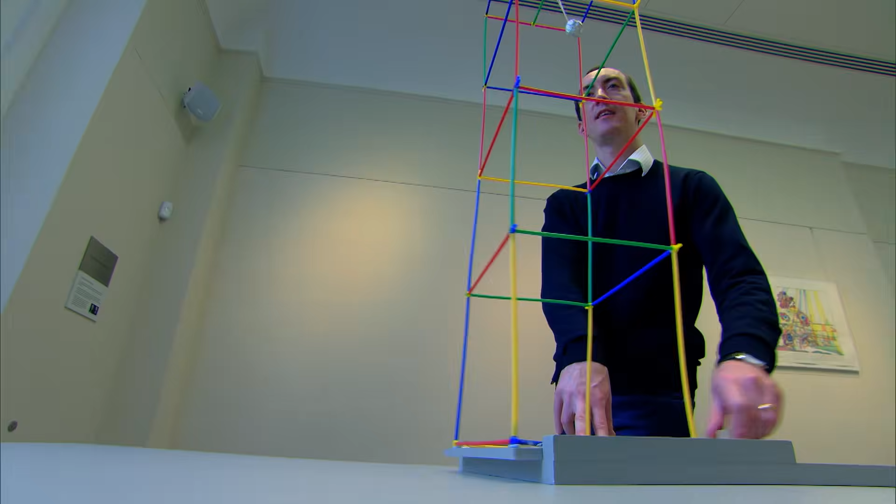The principle is simple. As the building sways one way, it pulls the damper with it. As the building starts to sway back, the damper is still travelling in the opposite direction, so it stops the building from going too far. It's amazing how much of an impact it has. It really does just stop the structure from swaying around. Without tuned mass dampers today, we just wouldn't have any of the kind of mega structures that we have. As buildings have got taller, so the dampers have got bigger.

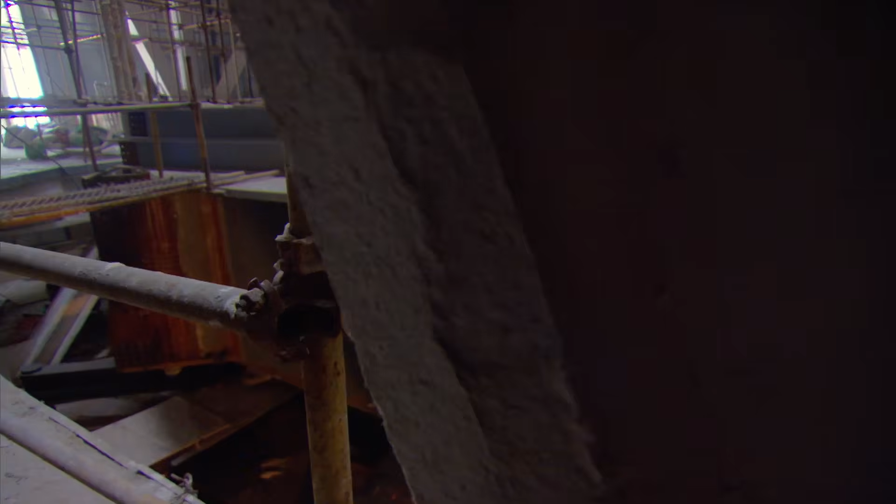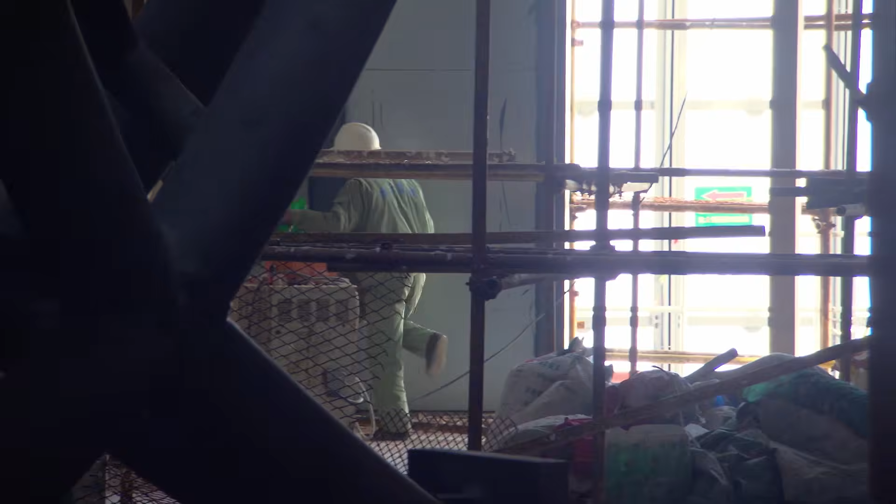We are walking to the upper portion of the TMD system, the mass damper system. Without this mass damper, we have to use a lot more structural steel and material to stiffen up the building. So despite taking up 5 of the tower's 128 floors and weighing over 1,000 tons, it actually made the building cheaper and lighter to construct.

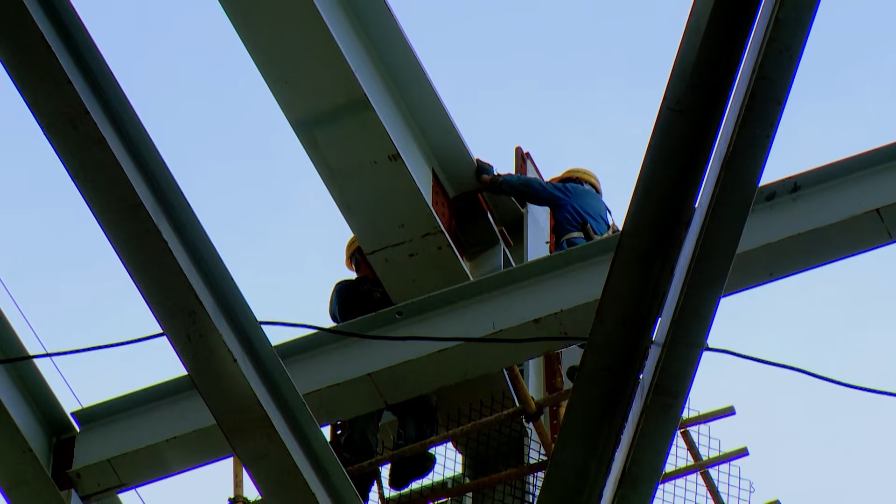It's taken 15 years of planning, design and testing, and 7 years of construction to raise this super tower from its foundations deep in the Shanghai soil to the tip of its 128th floor. But by drawing on the innovations of the past, adapting, improving them, and making groundbreaking innovations of their own, the engineers, designers, and workers on the Shanghai Tower have overcome substandard ground, high winds, and earthquake risks, and succeeded in making the impossible possible.

Look at this super tower, 632 meters tall. It is exceeding my expectation and a lot of people's expectations.